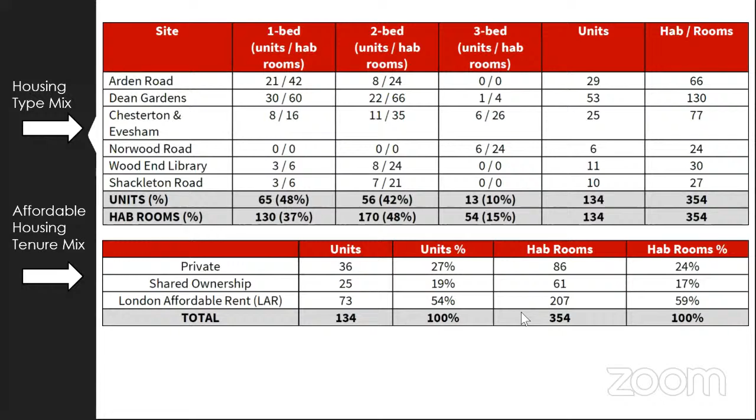The first of the 6 sites we'll present today is the Arden Road car park site. The application site comprises the Arden Road car park, located at the corner of Arden Road and Uxbridge Road in West Ealing, currently providing 25 public car parking spaces and 3 motorbike spaces. The site extends to approximately 860 square meters and is located in the Ealing Broadway ward.

To the north of the site is the Arden Road Oasis Community Garden, a public amenity space run by the community. The community garden is to be retained as part of the proposal.

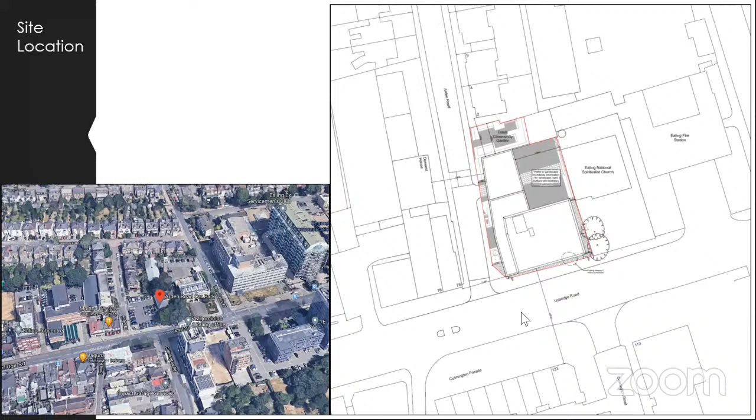The surrounding area comprises a mix of uses. The site is bordered by the Ealing National Spiritualist Church to the east, beyond which is the Ealing Fire Station. To the west, across the road, is a 2-story terrace with 2 restaurants at ground floor and residential above. Also to the west are Derwent House, Avon House, and Trent House, all 2 and 3-story office blocks, though Derwent House has since been converted to residential use.

To the north of the site, opposite the community garden, are 2-story semi-detached houses. To the south is Culmington Parade, a 4-story block with shops at ground floor and residential flats above. Also to the south is the 9-story A2 Dominion office building at 113 Uxbridge Road.

The emerging context along Uxbridge Road and further afield is undergoing significant transformation, with recent introduction of larger-scale, higher-density buildings. Most notable is the hotel development opposite the site at 109 to 111 Uxbridge Road, the 9-story A2 Dominion office building at 113 Uxbridge Road, Exchange Plaza at 52 to 58 Uxbridge Road on the opposite side of the fire station, which is a Part 6 and Part 10-story office building, and several other taller buildings along Uxbridge Road.

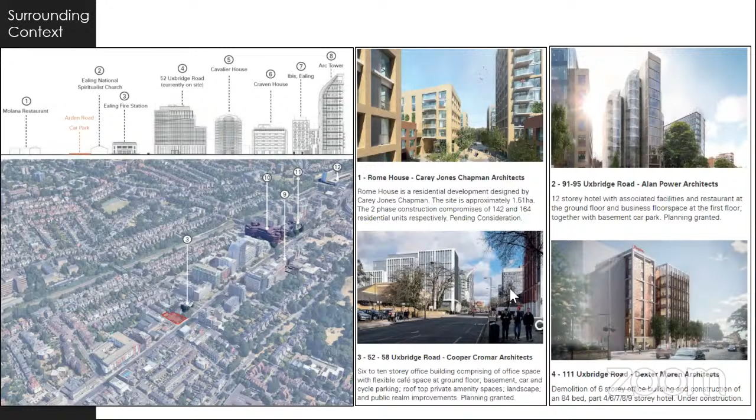The proposal at this site is for construction of a Part 8, Part 6, and Part 4-story building, comprising 29 residential 1- and 2-bedroom units and a commercial unit at ground floor. The development is considered to integrate well with the existing and emerging collection of taller buildings along Uxbridge Road. The design is of high architectural quality and would provide legibility to the area, improving the visual amenity of the streetscape and public realm while activating the commercial street frontage, bringing further vitality.

The massing involves a transition in height along Arden Road, with the rear of the building at 4 stories respecting the 3-story Derwent House and the existing residential properties to the north at 2 stories with a roof level. The height then increases towards Ealing Broadway, where it better relates to the existing taller buildings in the vicinity, most notably 113 Uxbridge Road directly across the road. A balanced judgment has been made as to the scale of any harm to the nearby Ealing conservation area.

Regarding the locally listed fire station building, it is considered that any harm would be less than substantial upon the heritage significance of these assets, and that this limited harm would be outweighed by the significant benefits of the scheme. The proposal is therefore considered acceptable in this regard.

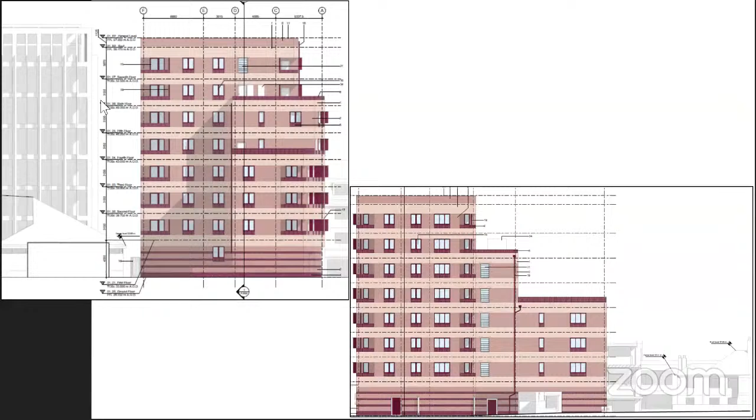The development would also incorporate refuse storage, cycle parking storage, plant rooms, a communal roof terrace, and associated alterations to the public realm along Arden Road and Uxbridge Road. They would also see a reduction in public parking spaces provided from 27 down to 9.

Materials in the locality vary, but include predominantly a mixture of red, glazed red, and buff brickwork, including some instances of decorative brick themes. There are several buildings with white or cream horizontal banding. In terms of the proposed building's appearance, brick would be the dominant material, which reflects the characteristic brick homes and buildings in the surrounding area.

The palette of proposed materials would consist primarily of horizontal bands of light terracotta colored brick, intercepted with darker bands, and at certain instances a darker red/purple glazed brick is proposed, particularly around the base of the building, the residential entrances, and the glazed soldier courses below the windows and edges of balconies. To complement the horizontal bands of brick, it is also proposed to use tinted precast copings and a dark red/purple color for all external metal work, including window and door frames.

Variations in the fenestration and banding would also create good vertical and horizontal articulation to further break up the mass relative to its immediate context.

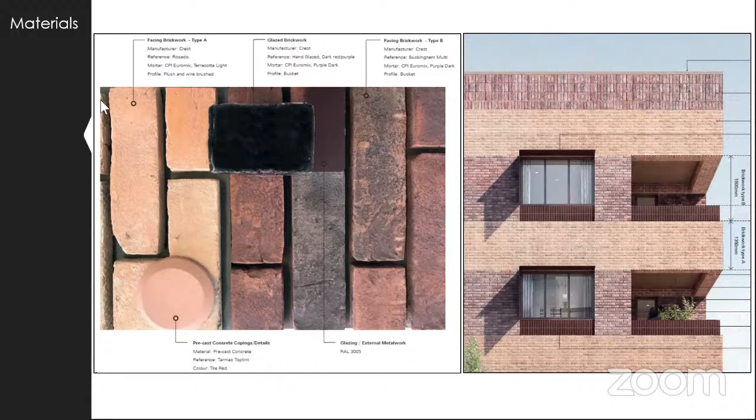A total of 15 units would be provided on a shared ownership basis, which equates to 52%, and 14 units would be for private sale. While this particular site would not provide any London affordable rent units, the scheme needs to be considered in the context of the wider affordable housing program approved by Ealing's Housing Department.

As a whole, the 6 sites would far exceed the required affordable housing tenure mix set out in local policy. All of the proposed dwellings would be dual aspect or above, meet the minimum internal and external space standards, and would have a well-designed layout that would enable a good standard of living for all residents.

The proposed development would optimize the regeneration potential of the existing underutilized car park site in a suitable location. The scheme would deliver 52% affordable housing to bridge the gap between identified housing need and supply within the borough. The provision of flexible commercial floor space would activate the ground floor and, in combination with additional residents, would enhance and sustain the vitality of this part of the Ealing Metropolitan Town Centre.

This is consistent with the local and regional policies, and therefore the principle of the residential-led mixed-use scheme in this location is considered acceptable.

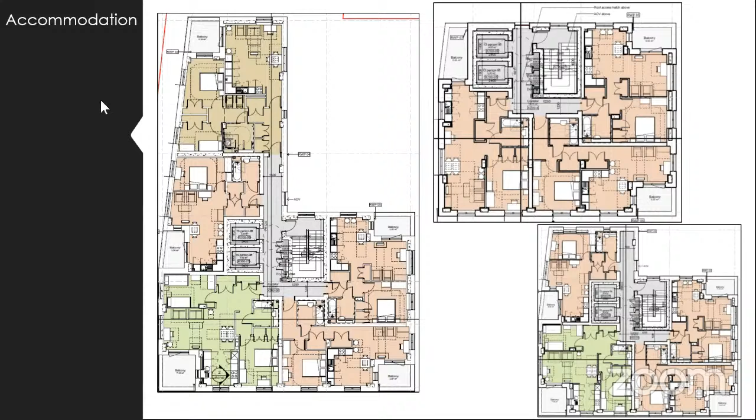Public consultation as part of the application was carried out in accordance with statutory requirements by way of site notices being placed on surrounding streets. The consultation process was doubled in length to 6 weeks in response to COVID-19.

162 representations from residents have been received, including those from Walpole Residents Association and the Ealing Civic Society. Of these representations, 158 objected to the proposal while 1 was in support.

Since publication of the report, a further 18 objections were received, including those from the Five Roads Forum Residents Association, Councillor Young, Councillor Kumar, the President of the Ealing National Spiritualist Church, and scanned letters sent from the church congregation.

The most common matters raised in these representations include the building's height and scale, density, design, impact on heritage assets, impact on trees and local ecology, impact on neighboring amenity in terms of sunlight, privacy, noise, and pollution, impact on the Oasis community garden, impacts on the neighboring church, highways impacts including congestion, road safety, loss of car parking spaces, and the housing mix and affordable housing tenure, quality of accommodation, and the consultation process itself.

These representations have been reviewed and acknowledged within the committee report and the briefing notes.

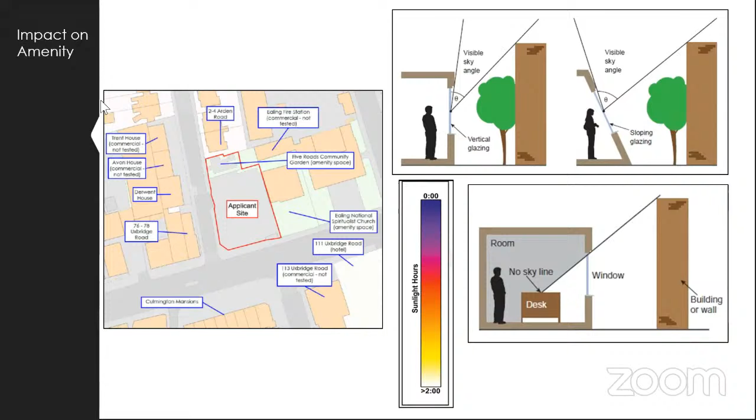For further clarity on some of the more common issues raised, the impact of the proposal on the Oasis Community Garden and Church have been considered and assessed. While it is acknowledged that when you develop an otherwise undeveloped site, some degree of impact is inevitable, it is considered that the level of impact would not be to the detriment of these spaces.

In terms of the impact on the church, the submitted sunlight and daylight assessment considered the space in front of the church as an amenity space and assessed it accordingly. The results demonstrate that this space passed the BRE guidelines on both the equinox and summer solstice dates. The level of sunlight and daylight to the building itself was not assessed, as the building is not in residential use, and this was not considered necessary at that stage.

Nevertheless, there would inevitably be a degree of overshadowing caused by the proposal, which would change throughout the day as the sun moves across the sky. There are high-level windows, shown on the bottom left, along the southern flank wall fronting onto the existing car park site. However, these windows appear to be obscure glazed and blocked by curtains, and are already significantly overshadowed by the existing roof overhang, as seen in this figure. As such, it is not considered that the change in light to these windows would cause detriment to the functioning or amenity of the church.

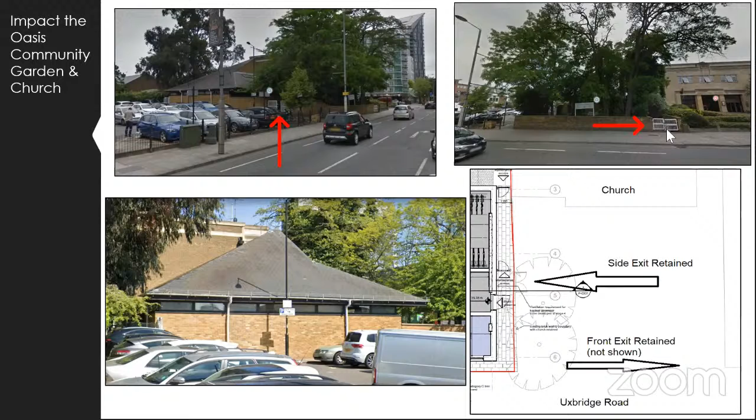The community garden is found directly to the north of the application site. It is acknowledged there would be some overshadowing to the space, which is inevitable where buildings are constructed to the south of amenity spaces. When assessed on the BRE test date, the spring equinox, results show the area would receive direct sunlight at just 1% below the BRE recommendation. This is a very marginal transgression, and sunlight levels would increase as the sun rises in the sky.

Additional analysis shows that this site passes the BRE test just one day after the spring equinox. The sunlight to the space would inevitably increase as the spring and summer months progress toward the summer solstice. Therefore, it is considered that this space would not be detrimentally harmed by the proposal, and on balance, the impact is considered acceptable.

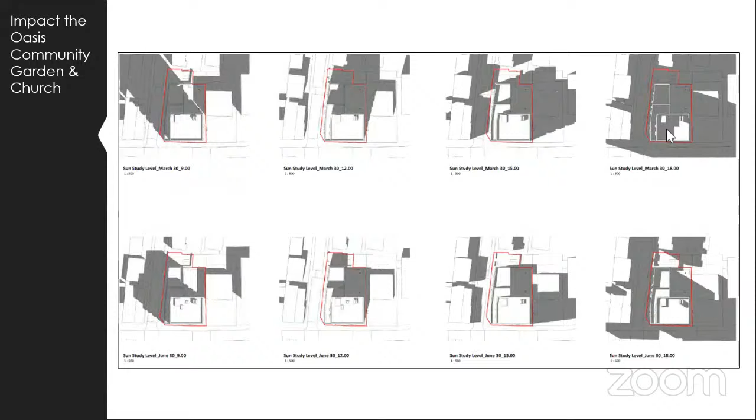The proposal is considered consistent with the aims of the relevant adopted policies and documents of the local plan, the relevant supplementary planning guidance, the National Planning Policy Framework, and emerging planning policy documents. It is therefore recommended that planning permission be granted, subject to conditions and appropriate planning obligations.

I now draw your attention to the briefing notes, which set out minor amendments to the recommendation, conditions, and the Section 106 agreement, and report additional representations received after the publication of the agenda. Thank you.

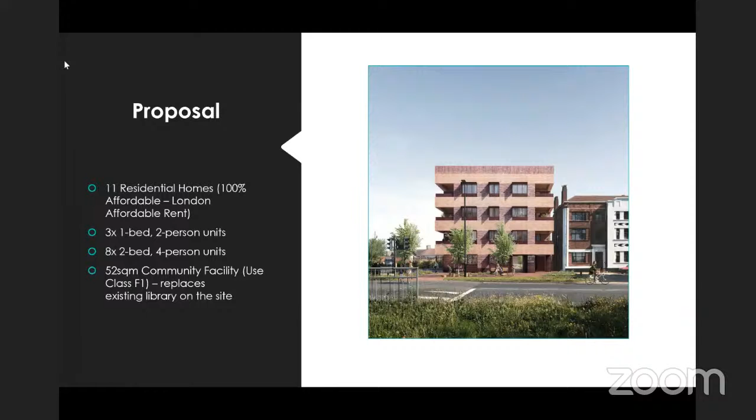Okay, so this is the second application of the 6 package sites. This is at Wood End Library, Whitton Avenue West in Greenford. The proposed development is for 11 residential homes, comprising a mixture of 1-bed and 2-bed units, as well as a community facility to be used as a library. This replaces an existing single-storey library on the site.

The development is located on the northern side of Whitton Avenue in Greenford, comprising a single-storey community facility at present. The surrounding area is predominantly 2-storey dwelling houses, mostly semi-detached, with some terraces. However, Oldfield Circus, just south of the site, is a 3-storey mixture comprising ground floor commercial and upper floor residential. The nearest bus stops are on Whitton Avenue and Oldfield Circus. The nearest underground station is Sudbury Hill, and the nearest national rail is Northolt Park, all indicated on this map.

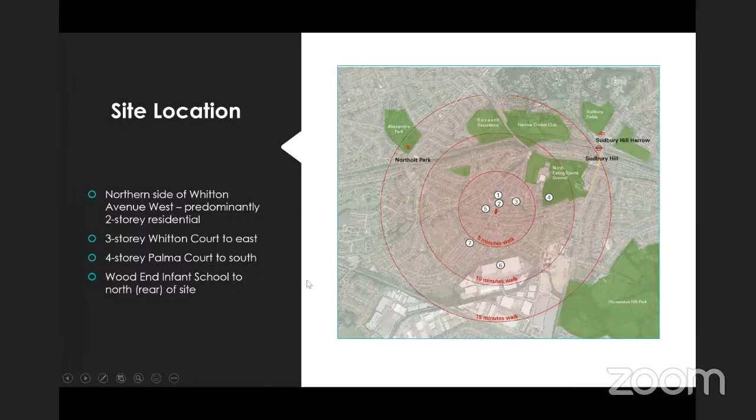So there are a few views of the site. This is the first one, all taken from Google Maps unless said otherwise. This is from Whitton Avenue looking north to show the single-storey library on the left, adjacent to Whitton Court, which is 3-storey residential, as well as the access road to the school adjacent to the site, just where these black railings are.

This is a site photo taken from the applicant, from the rear of the site. So the library is this building on the left, and then you're looking towards Whitton Avenue and the 4-storey Palma Court, opposite the application site, located on the corner of Whitton Avenue and Oldfield Circus.

And then the final view is the aerial view taken from Google Maps, where the site is indicated by the red pin, with Wood End Infant School to the rear, which is this curved building. And then you can see the 2-storey residential in the area, as well as the 3-storey buildings along Oldfield Circus, where it says the office and Vogue Ladies and City Gents.

So there are 2 aspects to this proposed development. The first bit is the community facility, which is the light blue at the front. The second aspect is the colourful sections at the back to do with residential. Residential will be on ground, first, second and third, so in total over 4 floors.

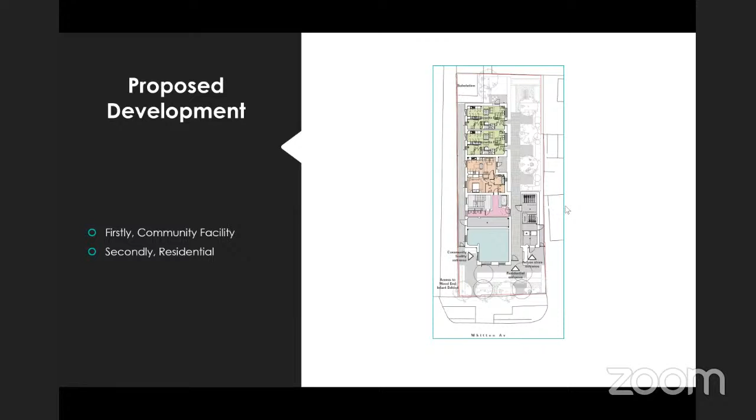So starting with the community facility. In July 2019, Ealing Council's Cabinet approved the Ealing Library Strategy. On page 15 of this document, it was recommended for Wood End Library to relocate to other community services in the locality. This was justified due to there being 3 libraries in the Northolt area: Northolt Library, the main town centre library, Northolt Leisure Library, located within the Northolt Leisure Centre, and Wood End Library, the application site. Of the 3 libraries in the locality, Wood End has the lowest footfall.

The proposal for this site includes a community facility, the library at the front, which is use class F1, noted in one of the conditions as restricted to use class F1 - learning and non-residential use is the terminology for that use class. Ealing Council are the applicant for the site and will seek a partner to operate a community managed library in the new building. However, due to COVID-19 restrictions, Ealing Council are yet to develop an approach to secure a community partner. I have been informed by our libraries team that once the lockdowns have been eased, Ealing Council's library teams will engage with the local community to find a partner to run the facility as a community managed library.

So the second aspect is the residential, which comprises 11 units, including 3 1-bed 2-person units and 8 2-bed 4-person units.

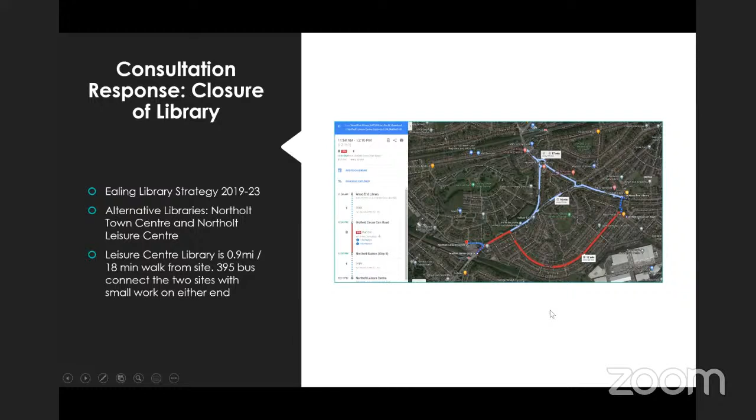During the construction, the libraries of Northolt Town Centre and Northolt Leisure Centre will be the nearest alternative libraries, with Northolt Leisure Centre located 0.9 miles away, equivalent to an 18-minute walk. Alternatively, the 395 bus connects Northolt Leisure Centre to the Wood End Library with a 3-minute walk between the bus stop and library on both sides. That's indicated on the map on your screen. If you need me to go back to this map during comments, just let me know.

The next consultation response was about height and bulk of the proposed development. The 4-storey development will be 1 storey higher than Whitton Court, located next to the site, which we saw in the earlier photo, and it allows stepping towards the 2-storey residential to the east. So it goes 4-storey this side, 3-storey next door, and then 2-storey residential.

To the south of the site is Palma Court, indicated by this white building, slightly grey, which is a 4-storey residential development located on the opposite side of Whitton Avenue West. The proposed development would be comparable in height to this existing building, and therefore it is in keeping with the character of this area in terms of height.

To the west is 2-storey residential. However, the separation distance due to the access road to the school is considered sufficient to not subsume these neighbouring properties.

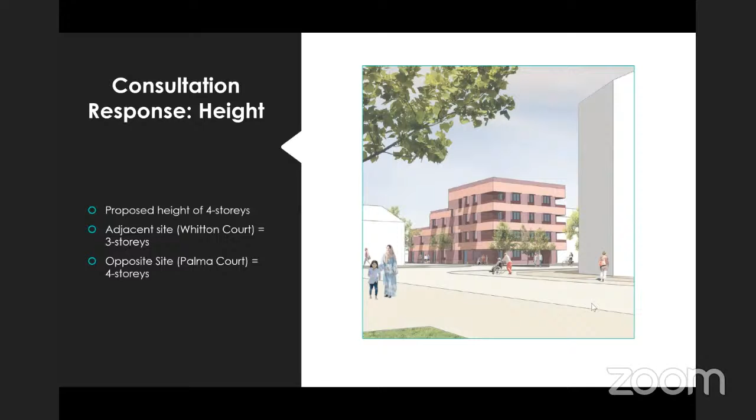No car parking is proposed within the site itself, in line with Ealing Council and London Plan policies. It is noted that there are 2 bus routes within 3 minutes of the site, and a London Underground Station within a 17-minute walk, as mentioned earlier. Therefore, it's considered that the development will not give rise to undue harm to parking pressure in the area. The area is not in a controlled parking zone, so there are no restrictions to the parking in the bays nearby the site. Nevertheless, it's not considered to be detrimental to the amenity of the existing residents.

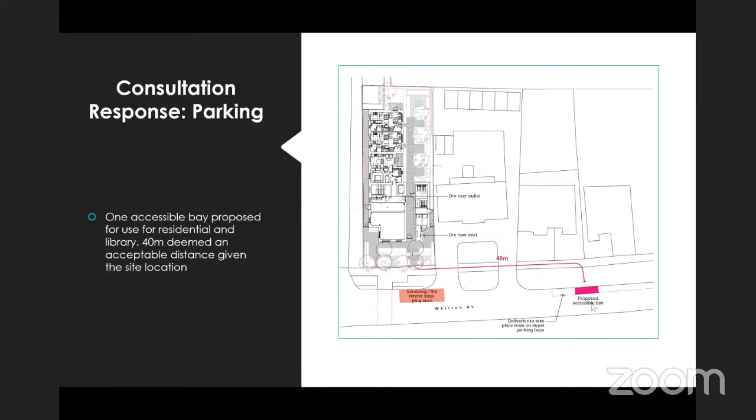The next issue is about disabled access, which had a few comments. As stated before, there will be 1 accessible bay within the existing bays, and then a section 106 contribution to put a 2nd bay in. The accessible parking will feature access via an existing pathway.

This is on the 2nd photo below. You can see there's a path leading to the main footpath between the parking bays, and this is where the accessible bay will be going, meaning users would not have to walk on the green verge. This would provide a safe access point for new residents and users of the library. It is also noted that the flats would be M4(2) compliant, with access via the ground floor or via a lift in the lobby. There is also a 1-bedroom unit located entirely on the ground floor.

The lift is proposed to be no less than 1100 millimetres by 1400 millimetres, in accordance with approved document M, a building regulation document, and will also have a clear area of 1500 millimetres directly outside the lift doors, which is suitable for wheelchairs.

All stairs will be to approved documents M and K, both building regulation documents, and are therefore suitable for ambulant disabled users. This therefore meets all Ealing and London policies regarding equality and accessibility for all.

To summarise, the site provides a replacement community facility to be used as a library and be community managed. The site provides 11 residential units, all 100% affordable, all 100% M4(2) compliant, and is complementary to the street scene and surrounding developments. The scheme would maximise the use of the site and provide a development which meets the requirements of local and national policies.

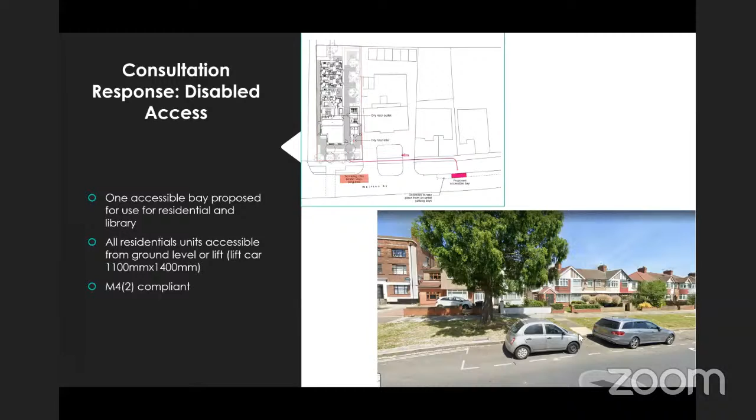Okay, thank you, Sean. I don't see anyone else. Councillor Mahmood is indicating - well, I've got a couple of questions before Councillor Mahmood. I'll bring in Councillor Mahmood.

So two questions. One is two units don't have private amenity space, and what is the reason behind that? The second question is if a community group is not found for the library, what will happen to that space?

Regarding the private amenity space, the layout of the proposal has been amended a number of times through the pre-application service. You can see that in your design and access statement, document 1. It's been amended several times to reduce any overlooking into the school especially, and in order to maximise the number of London affordable rent units on the site, as well as offer as many units as possible private amenity space, 9 out of 11 have got this, in order to both not harm existing residents and existing users of surrounding sites, and to ensure there's private amenity for as many residents as possible.

It is noted that the communal amenity space is directly outside the entrance to the site, so it's not long distances between units to the communal amenity space. As you saw in the diagrams, the aspects it will look like - that was deemed sufficient and in keeping with objectives regarding amenity. What was your second point?

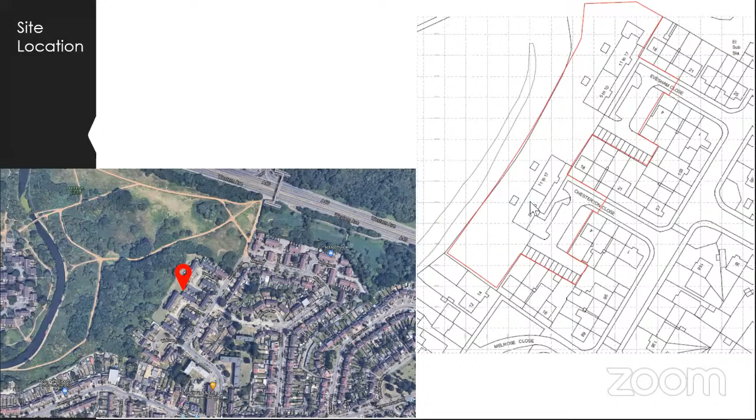The next site on tonight's agenda is the Chesterton and Evesham site. The application site comprises the land adjacent to two blocks of flats, one at 5 to 17 Chesterton Close and the other at 5 to 17 Evesham Close, as well as two rows of garages on both roads. The site forms the termination of two cul-de-sac streets, both accessed off Marnham Crescent, and extends to approximately 5,900 square meters, owned by Ealing Council.

The site contains two areas of underutilized semi-private communal green space to the side and rear of the existing properties. The two blocks of flats currently accommodate 12 dwellings each, and there are two rows of small garages within the site, as you can see in these images. These are the two blocks and the rows of garages. This is some images of the space adjacent to the site where the blocks are proposed.

The 2 proposed houses at blocks 3 and 4, shown at the bottom of the screen, would be single-story in height, while the flatted blocks, blocks 1 and 2, would rise to 4 stories, stepping down to 3 stories to the rear where they face onto Marnham Fields, a green belt space just beyond the north of the site. Blocks 1 and 2 are designed to step back in plan and down in height towards the rear to maximize existing and new views towards the green belt.

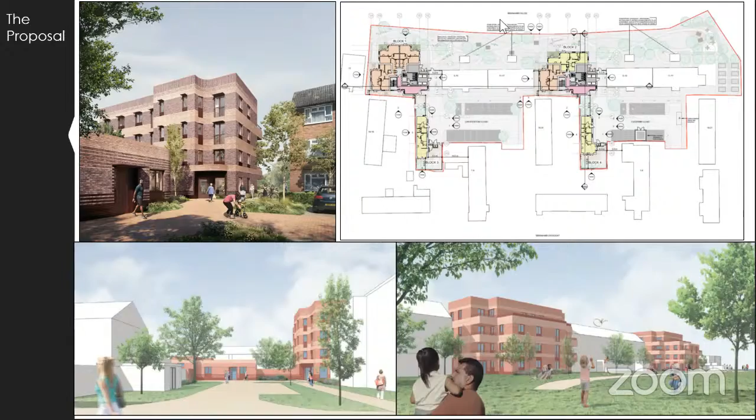This height and massing strategy is considered to be sensitive in design, taking due consideration of the site's immediate locality and neighboring buildings and uses. The palette of materials consists primarily of horizontal bands of light and dark colored brick. At certain elements, darker glazed bricks are proposed, for instance around the base of the building, around residential entrances, and the glazed soldier courses below windows and to the edge of balconies.

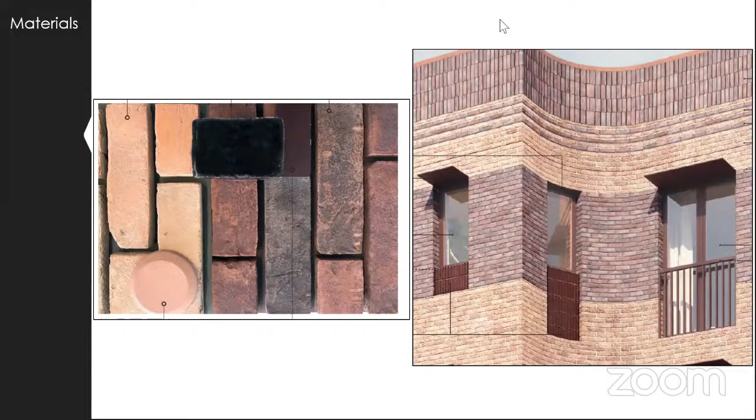The proposed development would optimize the regeneration potential of the existing underutilized site in a sustainable location and would offer 100% affordable housing to bridge the gap between identified housing need and supply within the borough. Therefore, the principle of residential development in this location is considered acceptable.

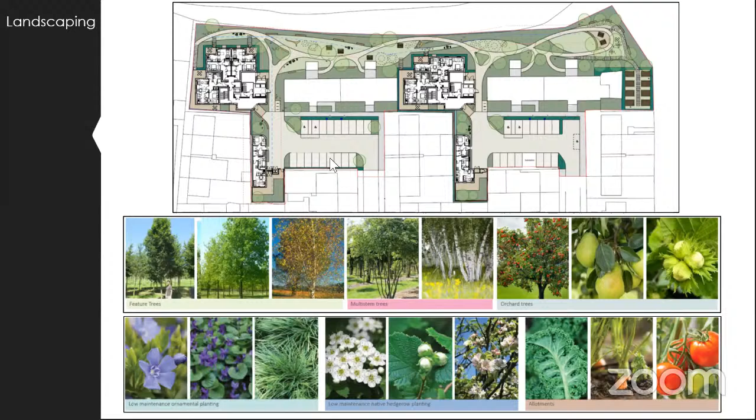Each of the proposed dwellings would have a well-designed layout and would enable a good standard of internal living. All dwellings would meet or exceed the minimum space standards and amenity space standards as set out in the London Plan. In addition, all units would be dual aspect.

As such, the proposed development is considered to accord with London Plan Policy 3.5, which seeks to secure high-quality housing developments by taking into account the local context, including density and character, and by providing new affordable and high-quality housing in an existing residential area, creating a more positive termination of the streets.

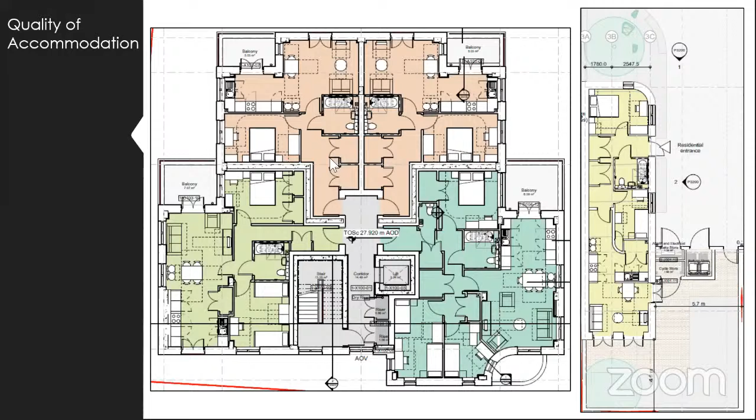Two representations from local residents have been received, both in objection. Matters raised include the potential loss of privacy from overlooking, increased noise and air pollution, additional car parking stress, increased traffic congestion, road safety, and concerns around nuisance during construction, impact on the local environment and ecology, and impact on existing infrastructure and amenities.

In addition, an objection regarding the proposed Block 3 was received, as this house would block access to a neighboring property's garden. These representations have been reviewed and considered and acknowledged within the report and the briefing notes.

The impact of the development on neighboring amenity has been assessed and has been found not to give rise to any undue noise emissions, overlooking, overshadowing, or an increased sense of enclosure due to the way the blocks have been designed. A sunlight and daylight assessment has also been submitted with the application and demonstrates that where there is an impact on neighboring properties, the scale of the impact is considered marginal and acceptable.

The impact has been assessed as minor overall in this regard. It is therefore not expected to have any detrimental impacts on the level of amenity available to the occupants of the host and the neighboring properties.

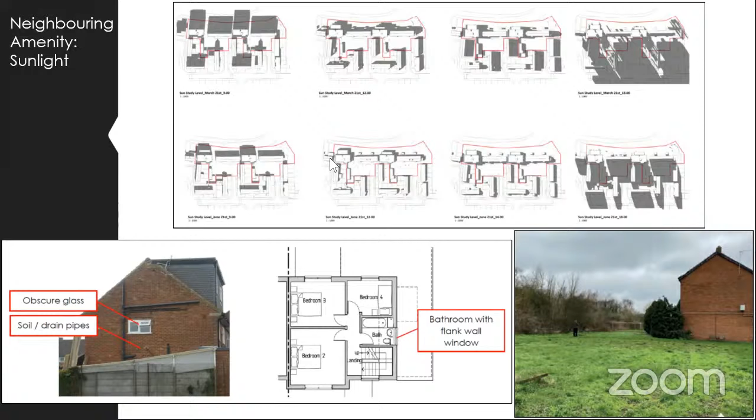It has therefore been concluded that the matters raised do not outweigh the recommendation for approval in this case. All other matters, including impact on local ecology, environmental health, transport matters, servicing, energy and sustainability, have all been assessed and found acceptable.

The proposal is therefore considered to be consistent with the aims of the relevant adopted policies and documents of the local plan, the relevant supplementary planning guidance, the National Planning Policy Framework, and emerging planning policy documents. It is therefore recommended that planning permission be granted with conditions subject to planning obligations.

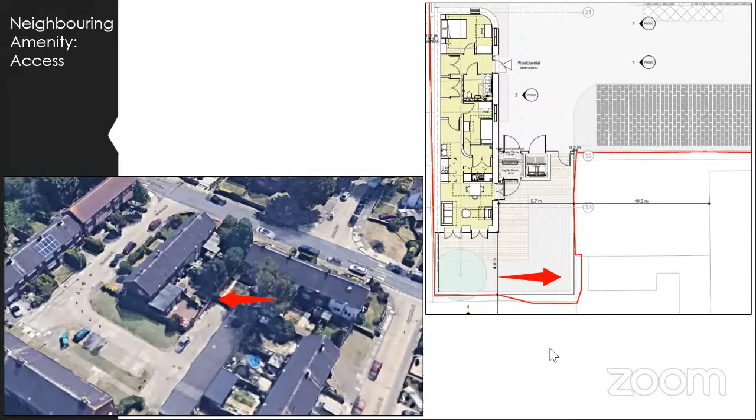We have an objector. Is it Zoe Lashley? It's Zoe. Yeah, hiya. Hi, so Katie, could you put on the timer? You'll have 3 minutes.

Hello. Hiya. And apologies, I've never done one of these sort of things before. That's okay, take your time. Katie, can you put the timer on so Zoe knows? Oh, and I've got a toddler approaching me as well, apologies.

Yeah, so I'm wanting to speak about a few of the things here. To start off with is the parking.

One of my main concerns is about the lack of parking in the area. I saw from the plans just mentioned that there's showing some additional parking, but it's losing a green space that's just next to some of the properties. If you've got about 25 proposed new residents, that's a lot of houses and a lot of parking needed. So yeah, that's one of my concerns.

Also, when you mentioned about one of the properties losing access to the back of the property, that's where it's used for parking and for work loading, a car is put in there to load up stuff from equipment. So I'm presuming that access wouldn't be possible from that back area anymore, and it would be impossible for one of the cars that parks there to go through the house to get out.

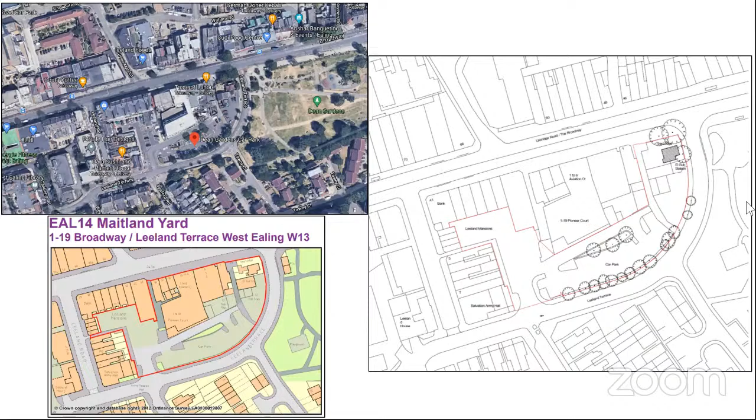The area surrounding the site comprises larger urban blocks to the north, fronting Broadway, and a smaller grain of residential terrace housing to the south of the site. The immediate area is characterised by 2 to 3 storey Victorian red brick buildings and more modern post-war infill development. Dean Gardens car park remains an open area of land that lacks definition to the urban block.

There are significant redevelopments undergoing along Uxbridge Road, which is altering the prevailing density, height, and character of the immediate area. These include 96 to 102 Broadway, where planning permission was granted for the redevelopment of the site to provide 20 flats and just short of 1,000 square meters of commercial floor space on the ground floor, accommodated within a part 11-storey building fronting onto the Broadway and part 15-storey building fronting onto Singapore Road.

At 67 to 75 Broadway, part 5 and part 6-storey development was granted planning permission for the creation of a 70-bed hotel. At 72 to 76 Broadway, the planning committee resolved to grant, subject to completion of a Section 106 agreement currently underway, permission to redevelop the site to provide 56 flats and commercial floor space accommodated within a part 4, part 5, and part 9 and part 10-storey building. Finally, Sherwood Close was granted permission in 2015 for the redevelopment of the site to provide 305 residential units.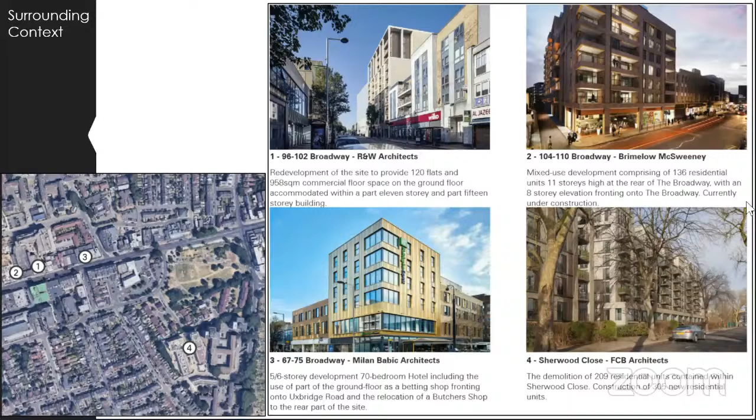The proposal at this site is for the construction of a 4-storey building, a 6-storey building, and an 8-storey building, with lower ground floors comprising 53 residential units in total, and a commercial unit along Uxbridge Road under Use Class E. The proposal also includes provision of refuse storage, cycle parking, plant rooms, and associated alterations to the site access, along with public realm improvements comprising comprehensive landscaping and an altered car parking layout. The proposal would retain a total of 37 car parking spaces of the existing 76, situated within both existing car parks.

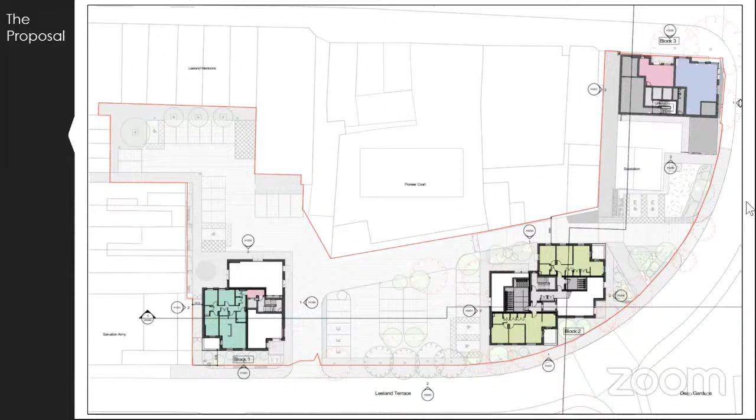The proposed 3 buildings have been designed to gradually step up in height from west to east. Building 1 is located on the western part of the site, in close proximity to the existing Salvation Army Hall, and rises to 4 stories. Building 2 is located in the center of the site and is proposed to rise to 6 stories.

Building 3 is located in the prominent location along the Broadway and rises to 8 stories in height. The proposed development is considered to accord with the intent to published London Plan Policy D3 and London Plan Policy 3.5, by taking into account the local context, including density and local character, by providing new housing in an existing residential area and re-establishing the strong building line and active frontage along Uxbridge Road and Leeland Terrace. The building's form, design, and materials overall of all 3 blocks would secure a high-quality design that responds acceptably to its location and would raise the appearance and amenity of this corner site.

The overall design would therefore be compliant with the development plan policy in terms of urban design. A balanced judgment has been made, similar to the Arden Road site, in terms of the scale of any harm to the nearby Ealing Green Conservation Area and locally listed buildings along Broadway. It is considered that any limited harm caused would be less than substantial in accordance with the NPPF upon the heritage significance of these heritage assets, and that this limited harm would be outweighed by the significant benefits of the scheme. The proposal is therefore considered to be acceptable in accordance with paragraphs 195 and 197 of the NPPF.

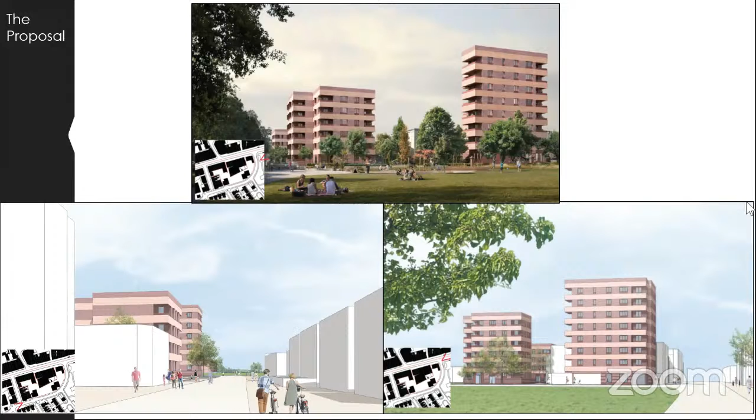The proposed buildings are characterized by horizontal brick banding of light and darker colored brick. At certain moments in the building, darker glazed brick is proposed, for instance around the base of the building, entrances, and around the windows and edges of balconies. To complement the horizontal banding of brick, it is proposed to use tinted precast copings and a dark red/purple color for all external metalwork, including windows and doors.

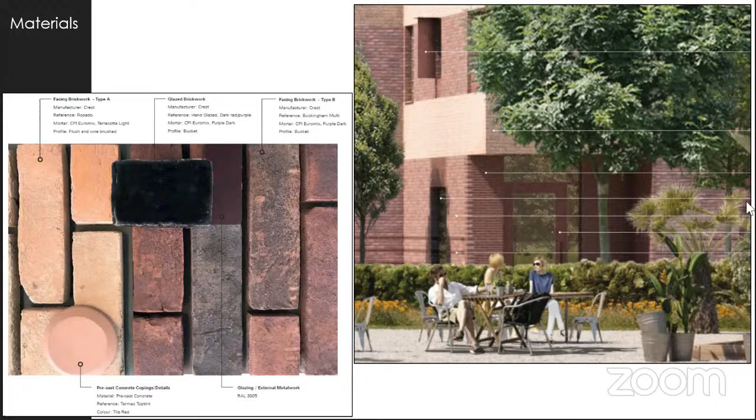The proposal comprises 22 units for private sale, representing 41.5%, and 31 affordable homes at 58.5%, therefore exceeding the London Borough of Ealing's target for 50% affordable housing. The proposal includes a policy-compliant affordable tenure split of 21 genuinely affordable London affordable rent units at 68%, and 10 shared ownership units at 32%.

All of the proposed units would meet or exceed the minimum internal space standards contained in Table 3.3 of the London Plan, and would all be dual aspect to provide excellent natural light and natural ventilation.

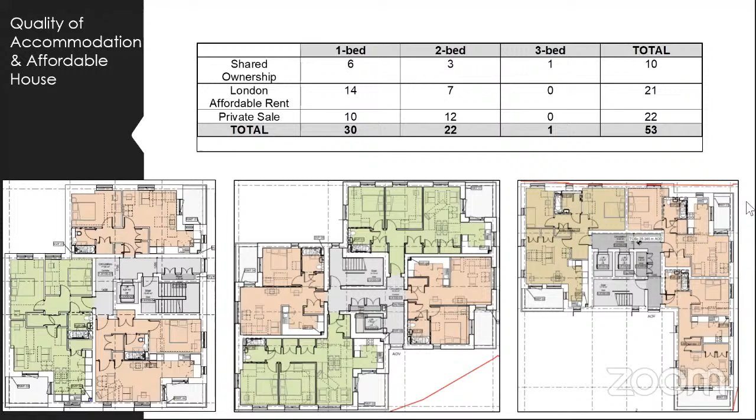The proposed development would be car-free, with all residents being exempt from obtaining a parking permit for parking within the CPZ. Two wheelchair accessible bays, however, are proposed for future residents of the development, and both will benefit from active vehicle charging points.

Each apartment would be provided with access to an internal bike store within the building, with corridor widths being appropriate in line with the London cycling design standards to allow for appropriate access. A total of 93 long stay and 10 short stay cycle parking spaces would be provided. Bin stores for the residential development are strategically located for access by collection operatives, in close proximity to the road access.

The proposal is supported by a comprehensive and considered landscaping, amenity, and play space strategy. Overall, 519 square meters of amenity space and play space is proposed across the site. A total of 340 square meters of private amenity space is proposed in the form of private balconies. In addition, a communal square is proposed, extending to 65 square meters. A total of 114 square meters of children's play space is proposed through features including stepping logs, playable mounds, and boulders.

The proposed development would optimize the regeneration potential of the existing car park sites in this sustainable location. The scheme would deliver 58.5% affordable housing to bridge the gap between identified housing need and supply within the borough. The provision of flexible commercial space along Uxbridge Road would activate the ground floor of Block 3. In combination with the additional residents, this would enhance and sustain the vitality of this part of the Ealing Metropolitan Town Centre. This is considered consistent with the local and regional policies, and therefore the principle of this residential-led mixed-use scheme in this location is considered acceptable.

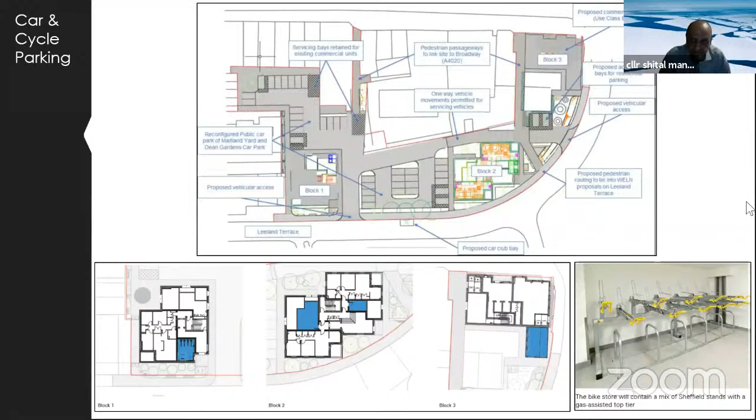7 representations from residents have been received, including those from the chair of the Walpole Residents Association and Ealing Civic Society, all in objection. The most common matters raised in these representations include the height of the proposed buildings, the design and use of materials, the loss of existing trees, impact to neighbouring amenity in terms of loss of sunlight and daylight, privacy and outlook, loss of car parking, and the affordable housing tenure offered. These representations have been reviewed and acknowledged within the report. However, it has been concluded that the matters raised do not outweigh the recommendation for approval in this case.

All other matters, including impact on local ecology, environmental health, transport matters, and servicing energy and sustainability, have all been assessed and found acceptable. The proposal has therefore been recommended for approval, subject to conditions and appropriate planning obligations. Thank you.

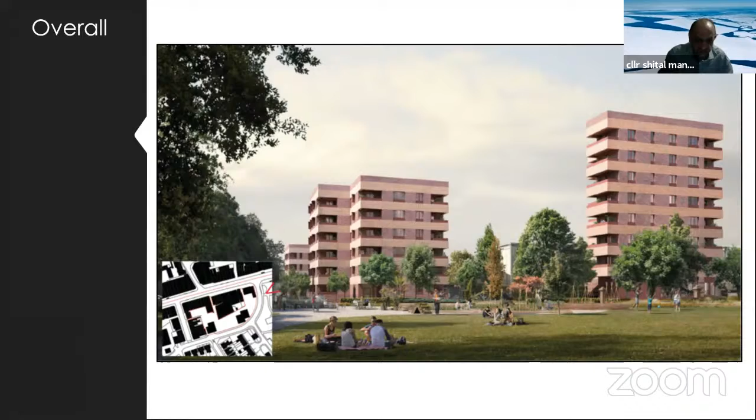Okay, I'll go from top down. Councillor Ray Wall, Councillor Miriam Rice, Councillor David Milliken, and Councillor Paul Conlon.

So Councillor Wall, you won't be surprised what I'm going to ask. Pepper potting. I was going to ask Wade to do it, but I thought I'd let you do it. Go on then. Well, yeah, the word asks the question really, so I won't. This time of night, I just want to ask that question.

Okay, Councillor Rice. Sorry. Okay. Thank you, Chair.

Right, so again, I'm going to go back to the point about how useful it would actually have been to have had a site visit. I know it's impossible at the moment because I'm trying to get my head around the area and what I know about the area.

With all this building being in place, we've said that there'll be no issues with parking. But what would concern me is in terms of delivery trucks or other trucks related to the retail in the area, there's the charity shop which does furniture there, and there will likely be vans having to collect furniture and take it away or bring it in.

And there's also, from what I believe, a farmers market in the area. I'm wondering how that would affect things when you've got the traders coming in with their vehicles, if there would be any issues there. I'm sure you could put my mind at rest very easily, but since I haven't had a chance to go there, I can't really get my head around it.

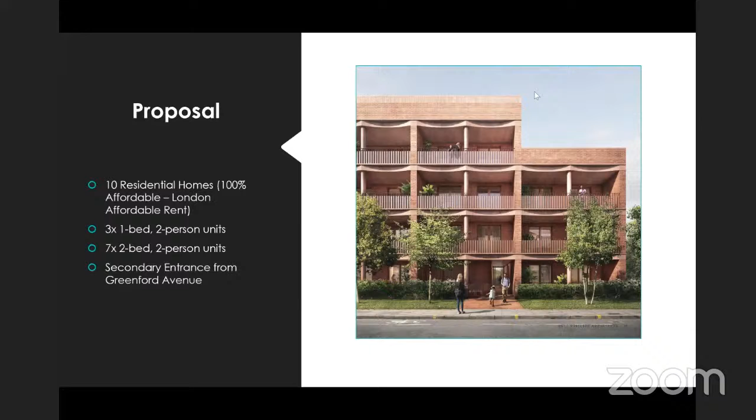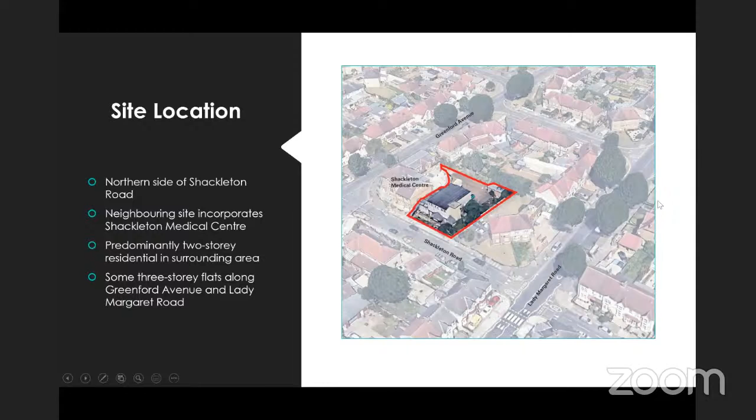Okay, so the fifth site is Shackleton Road, or MEAP Day Centre. The proposed development is for 10 residential homes, a mixture of 1-bed and 2-bed across 3 to 4 storeys, replacing the former day centre. The development is on the northern side of Shackleton Road in Southall and comprises the 2-storey former day centre, which is currently vacant. The surrounding area is predominantly 2-storey dwelling houses with some 3-storey flats nearby in parts of Greenford Avenue and Lady Margaret Road. Southall Broadway is located a 4-minute walk to the south, and the nearest bus stops are on Lady Margaret Road. Here are the views of the site, looking northwest.

So this is the application site, this square building, and that's the neighbouring medical centre, which is separate to this application. It's in use as a medical centre.

This is the view looking northeast, so you can see the medical centre, but our application site is the square building on the right, as well as the 2-storey semi-detached house next to the day centre, the former day centre.

This is the secondary entrance from Greenford Avenue, the access to the proposed communal garden, but access will be for pedestrians and cyclists only. From the aerial view, you can see it's in a predominantly residential area, and Southall Broadway is located just at the bottom where all these pins are.

The proposed development is for part 3, part 4-storey development comprising 3 1-bed units and 7 2-bed units. All 10 units are London affordable rent and all have good quality living conditions. All 2-bedroom units are dual aspect, whilst all 1-bedroom units are south facing, therefore acceptable regarding light.

All units meet minimum size for unit size, bedroom size and floor to ceiling heights, and all have access to private amenity space. There's a large communal garden at the rear of the site, with the secondary entrance from Greenford Avenue as indicated. All units are accessible via ground floor or lift, are M4(2) compliant, and conditions have been recommended regarding sound insulation to ensure quality living conditions. There'll be a section 106, which also includes restrictions to parking permits in the controlled parking zone.

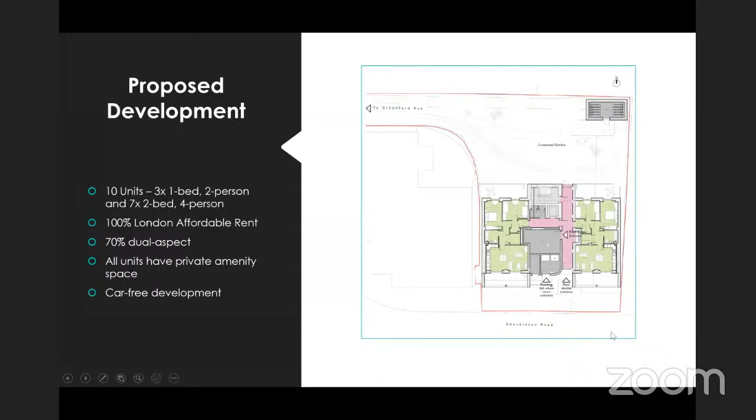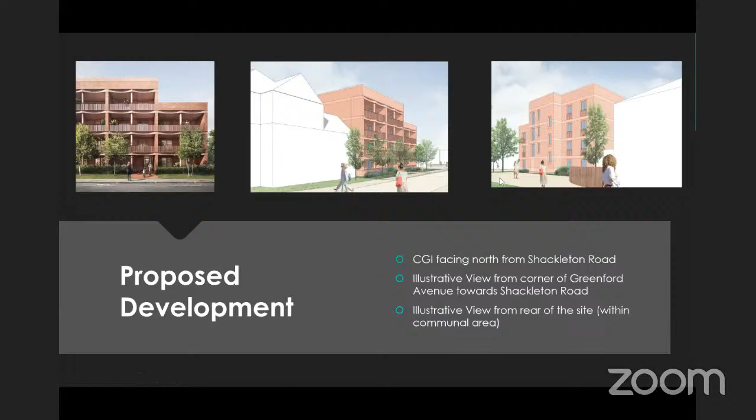In terms of consultation, just 2 responses were received. The main issues were density, but design and parking were other issues raised. In terms of density, which was raised by both objectors, as noted in the report, the density is within the guidance of table 3.2 of the London plan.

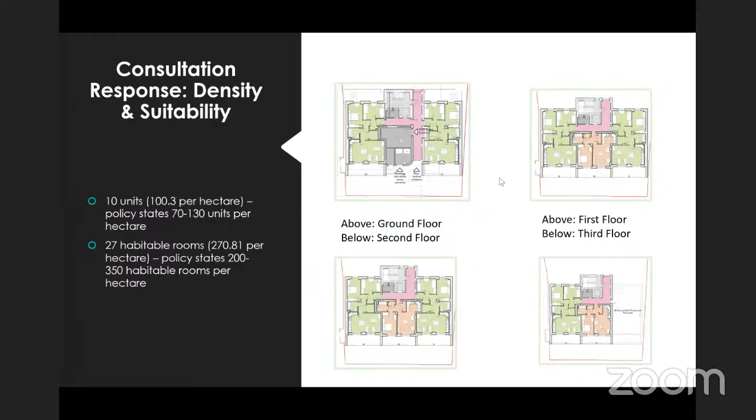Overall, 10 residential units being 100% affordable and providing housing stock complementary to the area. The scheme would maximise the use of the site and still provide high quality private and communal amenity space enhanced in the area, whilst the height of the proposed buildings would be complementary to the medical centre and the surrounding area. The proposal meets national and local planning policies, and therefore the recommendation is to grant permission subject to conditions in section 106. Thank you.

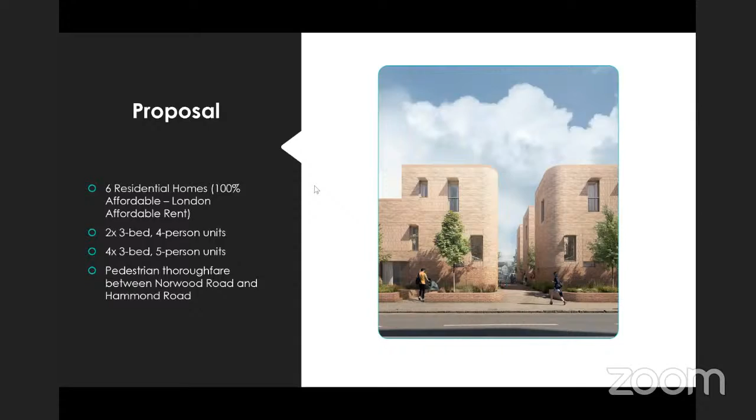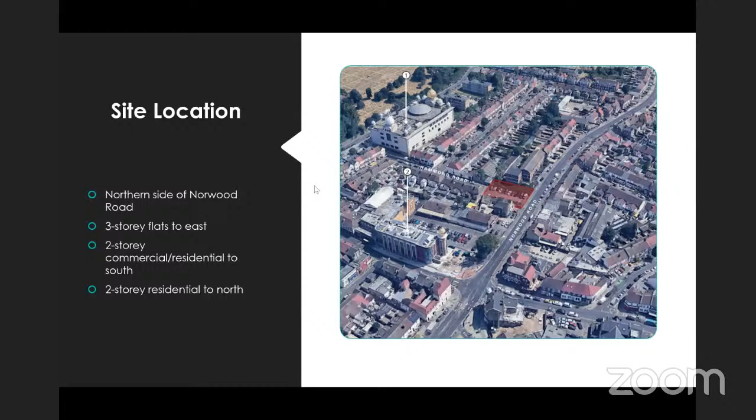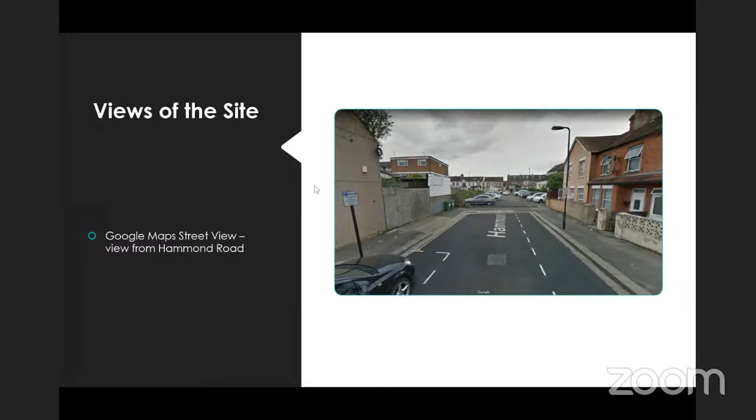The proposal is for 6 3-bed units and a pedestrian through route connecting Norwood Road and Hammond Road. This would be a mixture of 3-bed 4-person and 3-bed 5-person units, which meet the requirements of the Ealing Strategic Housing Market Assessment, or the SHMA.

All 6 units would be London affordable rent with good quality living conditions, meeting the minimum sizes of units and bedrooms and floor to ceiling heights.

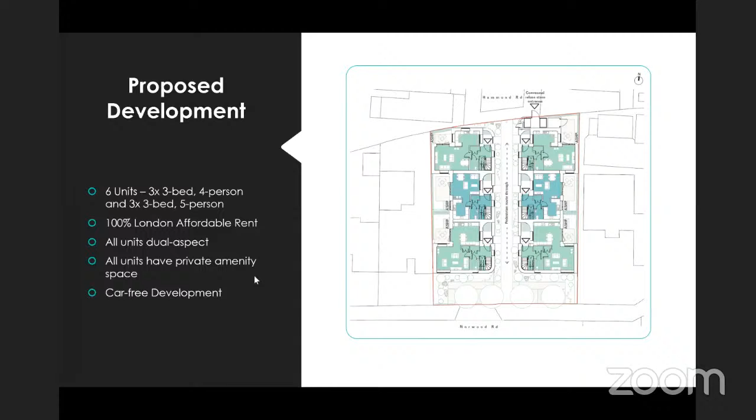They would have ground floor patios and first floor terraces. All units would be accessible for ambulant disabled users, and conditions have been recommended regarding sound insulation and Section 106 to restrict parking permits in the CPZ.

The proposed development would be 3 stories in the centre, stepping down to 2, which will complement the existing properties in the surrounding area.

A through route is proposed connecting Norwood Road and Hammond Road, and on this route are the entrances to all 6 properties, which would be called a mews.

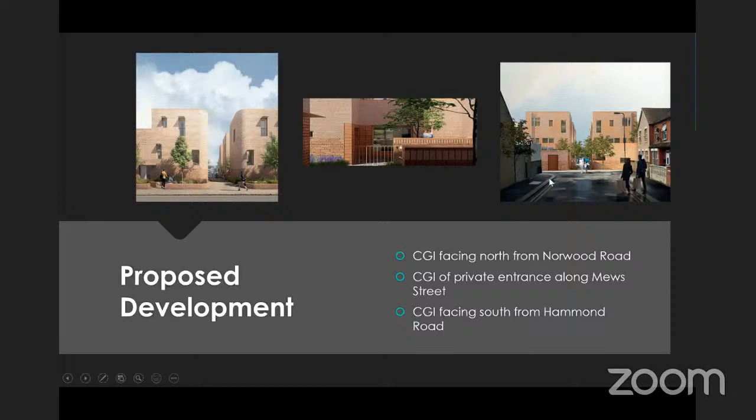One concern which would probably come up is the loss of 24 car parking spaces. This is in accordance with promoting sustainable travel policies in the London Plan and Ealing DPD.

A transport assessment has shown adequate capacity at Norwood Road Car Park 1 and Featherstone Terrace Car Park, which are indicated on the plans, and it is noted that both car parks are substantially larger than the application sites.

Financial contributions have been agreed regarding highway changes as well as disabled parking bays, the latter mentioned in the briefing note. All future residents will not be permitted to obtain parking permits through a Section 106.

Overall, 6 family-sized units being 100% affordable, meeting the need stated in the Ealing Strategic Housing Market Assessment, maximise the site, provide a clear thoroughfare between Norwood Road and Hammond Road, and the proposed building heights are complementary to the surrounding area.

The recommendation is to grant permission subject to conditions and a Section 106 agreement. Thank you.

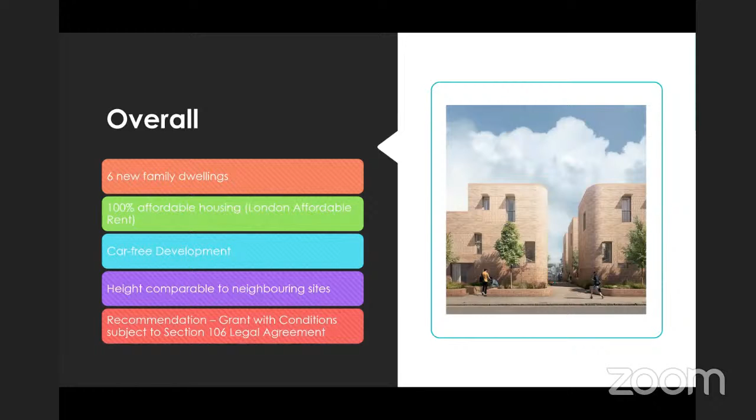Has any member got any comments to make? It's a small application, all family accommodation, which is what we usually ask for. I don't hear anything, so I'm going to move directly to the vote.